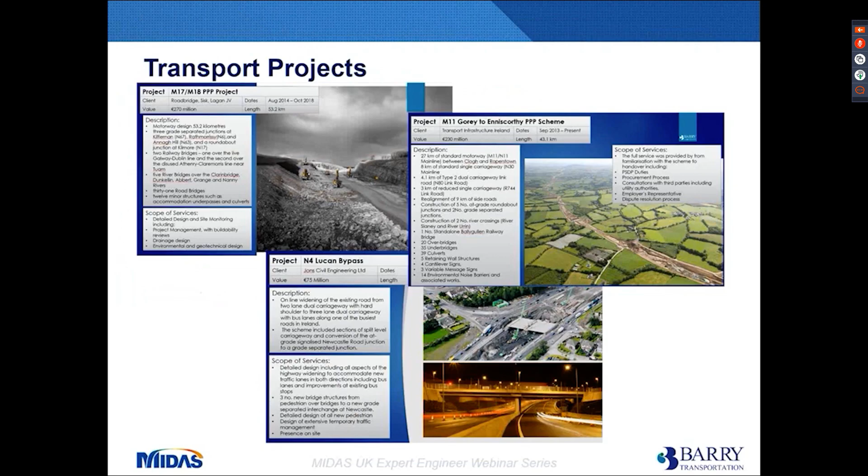But our main project portfolio is in Ireland. Specifically for roads and bridges, Barry Transportation was involved and is involved in the design, construction, supervision, or as an authority supervisory or advisory role for many major road projects in Ireland.

A little bit about myself. I have over 15 years experience in structural bridge design. I'm a chartered engineer, and I specialize in concrete bridges, but over the course of my career I also worked on a number of steel and composite structures.

I started my career in the Czech Republic, where I worked on a few motorway schemes, also in Slovakia. After moving to Ireland, I worked on a number of infrastructure projects here in Ireland and also in the UK.

Now let's have a look at what makes footbridge design different from a standard road or rail bridge, and what challenges the designer may have to face when designing a footbridge.

I would highlight key points related to footbridge design: aesthetics, structural robustness, and the need to pay attention to stability and vibration.

It is by no means unique to footbridges, but with footbridge design we may encounter these specific points more often, and they tend to play a bigger role at practically every footbridge we may design.

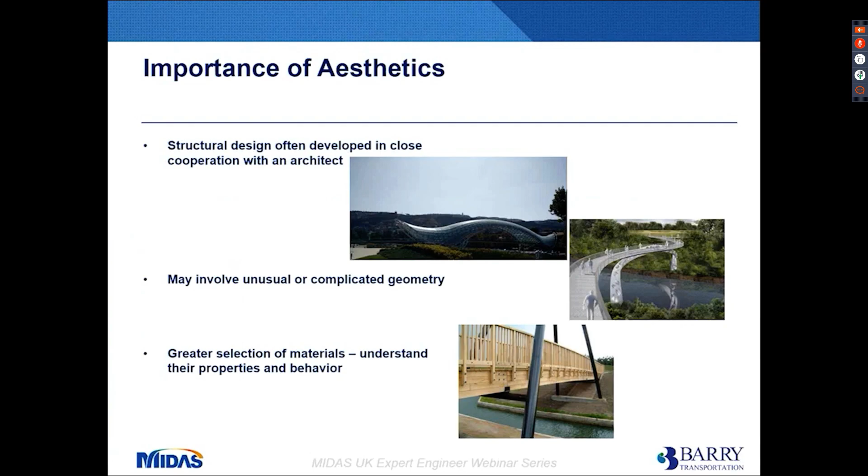In terms of structural robustness, when we design footbridges we want them to be lightweight. Quite often footbridges are very slender, airy structures, and at the same time we have to ensure that they have sufficient stiffness and strength to maintain their stability.

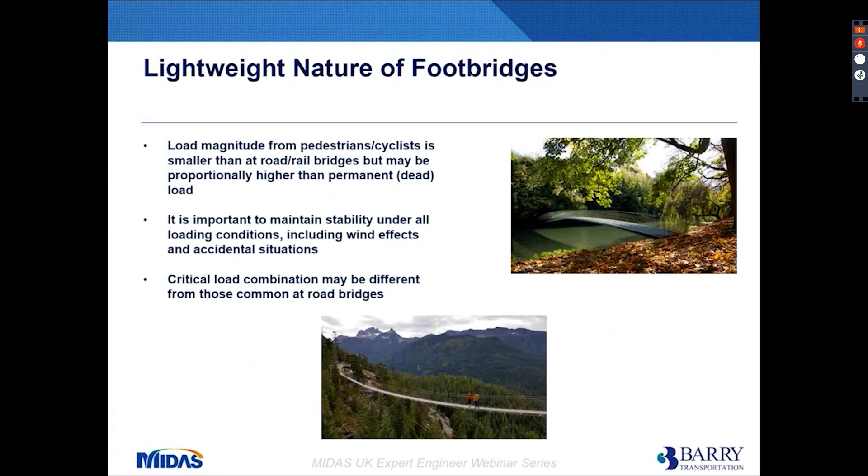It may be an issue for wind effects, or the critical combinations for the design may be quite different from those we are used to when we design road bridges.

With stability is also related dynamic response and vibration. It is not really usually an issue for a majority of short and medium span road bridges, but it is an important factor in footbridge design, because if the structure has a low natural frequency it may lead to unstable lateral response and, in the worst case, loss of stability.

But also it may lead to vibration, which may cause discomfort to users. Some of you who visited Northern Ireland would recognize that this is the Carrick-a-Rede bridge, a suspension footbridge on the north coast of Ireland.

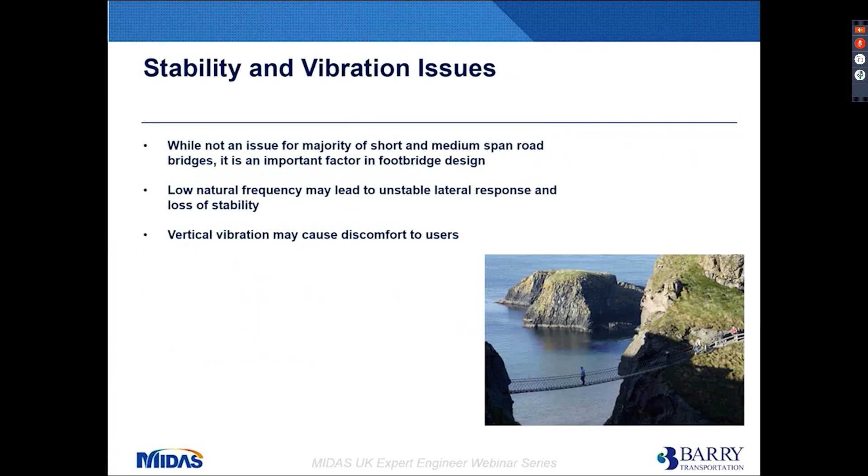Now we can have a look at some Eurocode requirements - just a brief overview of guidance and principles in the Eurocode which are particularly applicable to footbridge design.

Footbridges are subjected to different types of live load. So Eurocode 1, traffic loads on bridges, also contains requirements for dynamic loading on footbridges.

Also, accidental actions would be quite critical for footbridge design, as well as wind actions, and some of the clauses in the Eurocode dealing with wind actions cover footbridges.

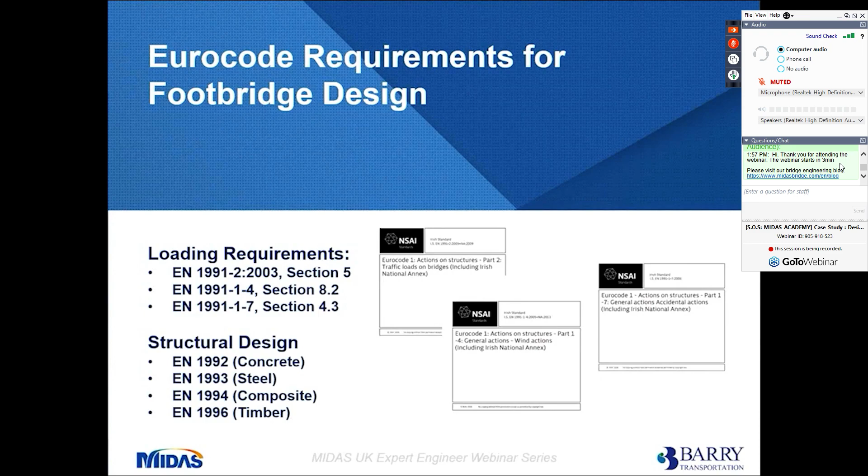The structural design is covered by Eurocode 2 to 6. The same limit state principles apply to footbridges - their global stability, member verification - as any other structure. So there wouldn't be any difference in this group of Eurocodes for the structural design.

We can have a closer look at the loading, because that's what differentiates the footbridges most from road and rail bridges.

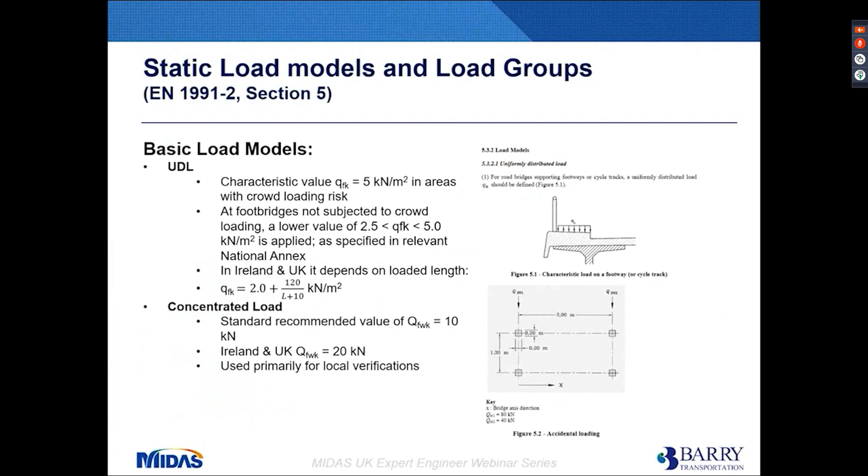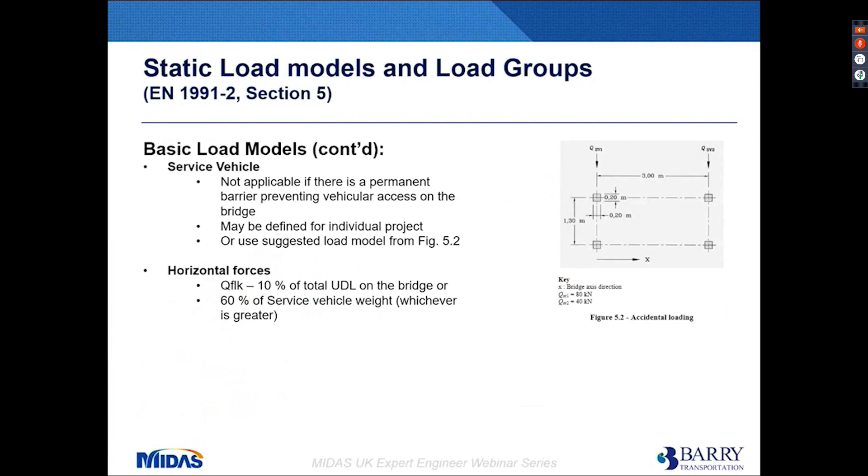The static loads and static load models are formed or made up from 4 elementary components, which is UDL (distributed load), concentrated load, service vehicle, and horizontal forces. And these 4 components are combined into groups of loads.

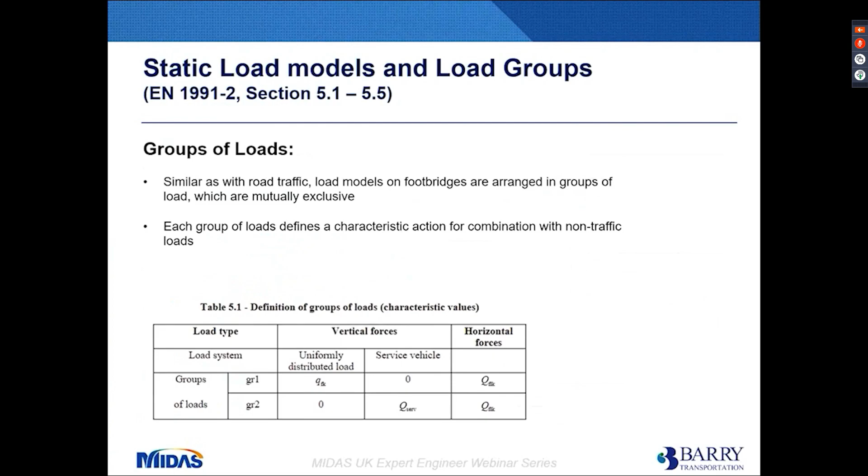It's a very similar concept to road traffic. So on footbridges, we either combine UDL and horizontal forces, or service vehicle and horizontal forces, and this group of load is treated as a single live load action for the purpose of combinations, factoring, and so on.

The accidental loads are covered partially in the traffic loading code in 1991-2, and partially in the accidental actions code 1991-1-7.

Since accidental loads can have fatal consequences for the structure and its users, and strengthening the footbridge to resist the full impact would be uneconomical, we take measures to avoid them.

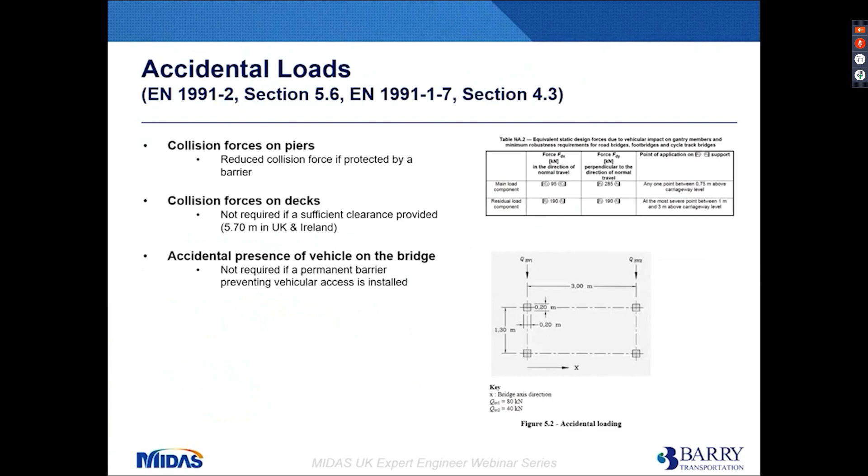Collision forces on piers of footbridges are reduced because the piers are usually protected by a barrier. Collision forces on decks - we can avoid application of this accidental load if we provide sufficient clearance, which in the UK and Ireland is 5.7 meters. And accidental presence of a vehicle on the bridge can also be avoided if a permanent barrier is installed, which prevents access of vehicles onto the bridge.

Now, what differentiates footbridges most from normal road bridges of short and medium span? That's the application of dynamic loads. There are two key points we need to pay attention to. The first is the natural frequency of the structure, because if any of the natural frequencies are identical to frequencies of forces applied to the structure - from pedestrians, joggers, or cyclists - there is a risk of resonance, which may lead to unacceptable vibration or even loss of stability.

So natural frequency is the first key point. The second key point to pay attention to is vibration. Vibration from normal pedestrian traffic should not cause discomfort to users, so that's why the code specifies a limit defined as an acceleration limit.

Dynamic effects of walking pedestrians can be represented by a periodic force, and this force will have a typical frequency between 1 and 3 Hertz. In the horizontal direction, the effects of walking pedestrians would have a frequency between 0.5 and 1.5 Hertz. And if there are a group of joggers crossing the bridge, that may induce forces with a frequency of about 3 Hertz.

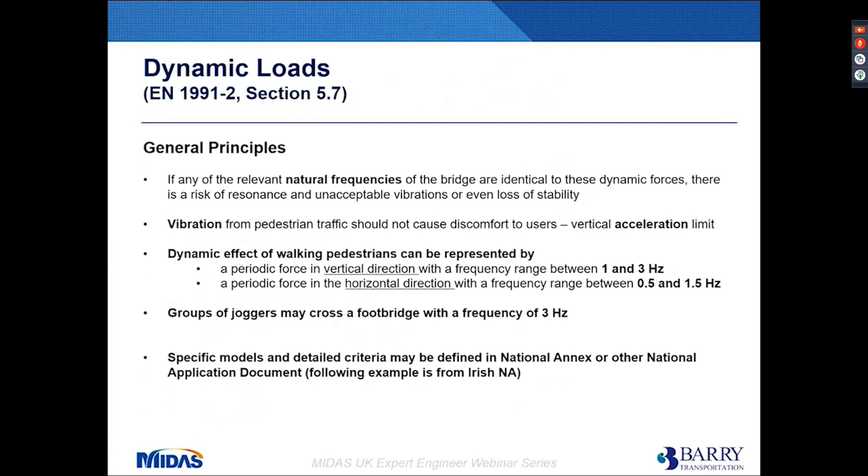So we can see that this range, say from 0.5 to 3 Hertz, would be a critical spectrum, and if any of the natural frequencies of the structure is within this spectrum, there is a risk of issues related to vibration or stability. So specific models and detailed criteria on how to fulfill this and how to achieve that the structure is stable are defined in the National Annex or other national application documents.

And for the UK and Ireland, the Eurocode 1 specifies the maximum vertical deck acceleration, which has a limiting serviceability value in the range between 0.5 and 2 meters per second squared. The exact limit value is calculated based on a formula in the code, and it depends on the site usage, route redundancy, and structure height.

Then the dynamic effects of pedestrians or groups of pedestrians are represented by the application of a vertical pulsating force, which moves across the span of the bridge. Again, there's an exact formula in the code which helps us as designers to calculate the magnitude of this load. It depends on the natural frequency and other factors.

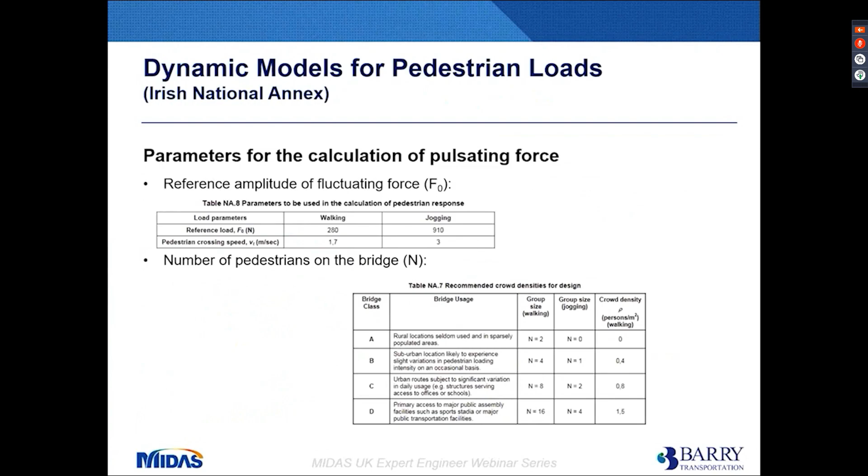The footbridges, for the purpose of dynamic loading, are split into 4 classes depending on the location and usage, and then the dynamic loading or dynamic force is applied. A different value may be applied depending on the bridge class. Also, we should know that the pedestrian crossing speed, how fast they walk, is also defined, which helps us define the duration of dynamic loading.

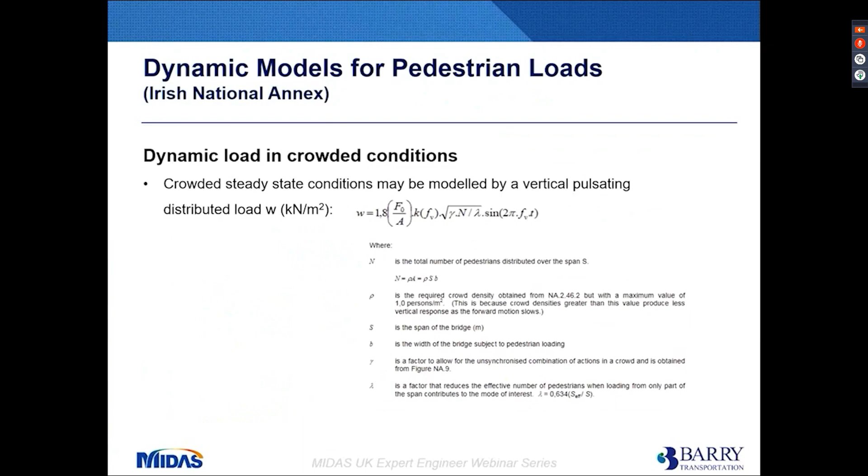The other aspect of dynamic loading would be loading in crowded conditions. So if the bridge is located in a city center or close to a stadium, it may get into a crowded state, and then instead of using a single point force pulsating and moving across the bridge, the dynamic loading is modeled by a vertical pulsating distributed load - a load over an area on the bridge. That helps us assess the possible vibration issues.

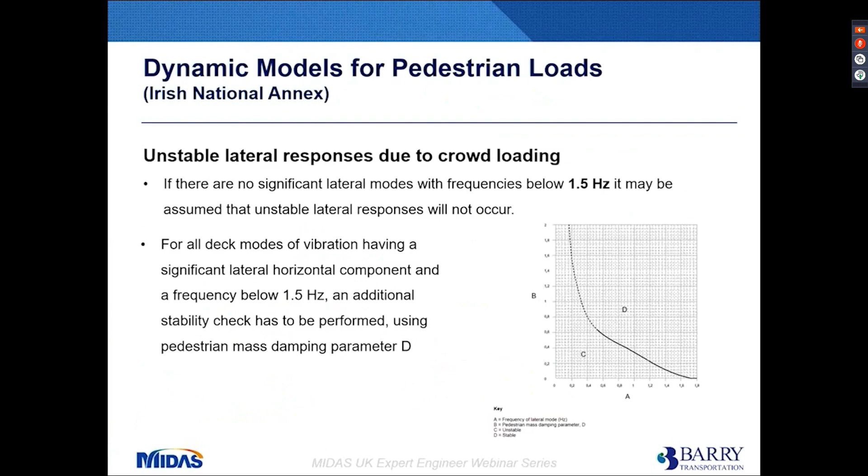The other requirement regarding natural frequencies is specified in the code: if there are no significant lateral modes with frequencies below 1.5 Hertz, we may assume that the structure is stable, that there's no risk of lateral instability. If any of the critical frequencies is lower than 1.5 Hertz, then there are additional checks to perform, or we may need to redesign the structure or introduce some damping devices.

Apart from pedestrian or generally traffic loading, in certain situations we may need to investigate the dynamic effects of wind loading, and the Eurocode dealing with wind loading also provides general guidance. It says that dynamic magnification effects due to vertical response can be ignored if fundamental frequencies in bending and torsion are greater than 1 Hertz, or we may need to fulfill an alternative condition.

But taking into account that generally we want to avoid frequencies below 1.5 or even 3 Hertz, it means that for most bridges where we fulfill the condition for the pedestrian dynamic load, we are fulfilling the condition for the wind loading as well. But for long span or special structures, it is something which needs to be taken into account.

So this was a brief overview of Eurocode requirements, which are applicable to footbridge design, especially in relation to dynamic effects, which are the main point for the footbridge design.

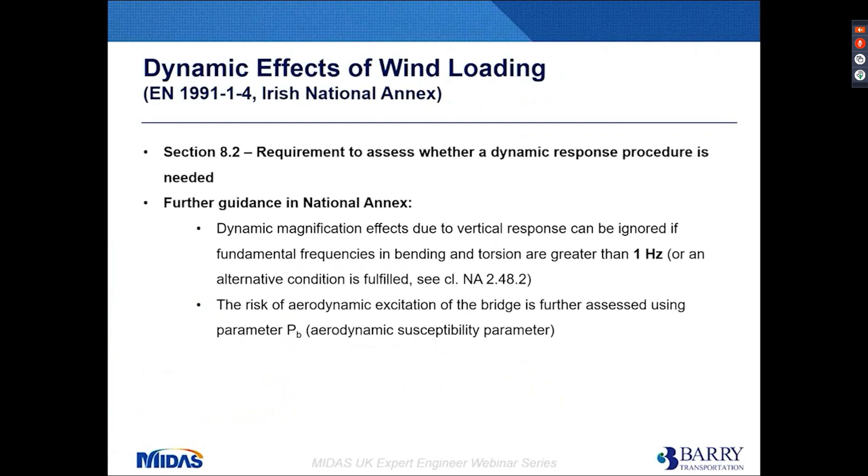Now we discuss how these requirements were applied on a Warren Truss footbridge. This structure has a span of 50 meters, a clear internal width of 3 meters. The maximum structural depth at midspan was 4.2 meters, and both top and bottom chords of the truss are curved in a gentle radius to improve the appearance. Although in this particular case, aesthetics wasn't a governing factor for the design because the bridge is in a rural location with low flow of pedestrians.

The design of this footbridge was actually developed as a result of a value engineering exercise or proposal, because the original structure was a 2-span beam and slab, and we proposed a single-span structure to avoid placing the support in the central median of the motorway, and the truss works well for this arrangement.

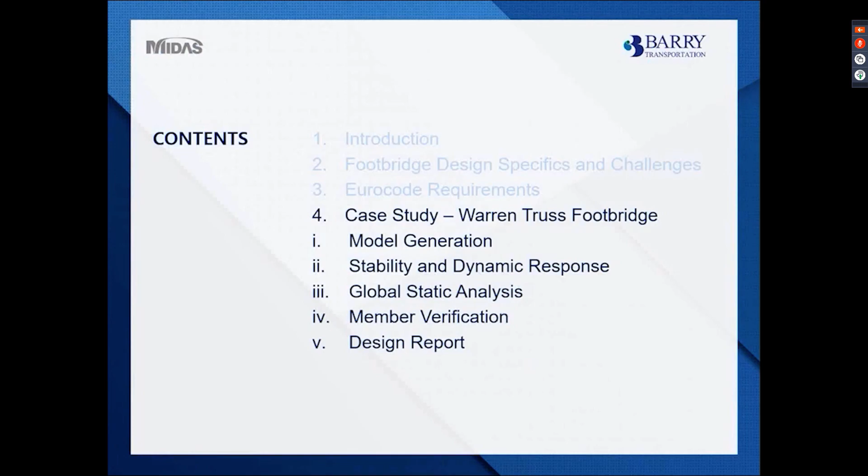So in the second part of our webinar, we can focus on how this particular structure, or generally a truss, can be generated in Midas, how we can generate a model in relation to what we discussed in the Eurocode requirements for dynamic response and natural frequencies. We will look into stability and dynamic response, and again how this can be performed in Midas. Then global static analysis, member verification, and the generation of the design report.

To create the geometry of the structure in Midas, there are a number of options available to us. One method is using the Midas Truss wizard. Midas has a set of tools called wizards for generating geometry of basic structures, so there are wizards for arches, for culverts or frames, as well as a wizard for truss.

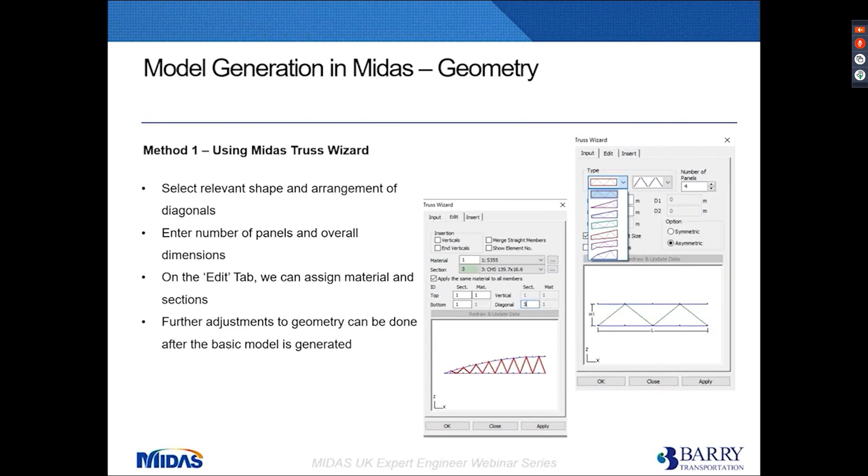We can select the specific or closest similar shape of truss, enter a number of panels and overall dimensions. We can edit nodes or even assign material and sections, and then do final adjustments when the geometry is generated. So this wizard will generate a 2D truss for the structure, like the Warren Truss footbridge. In our case, this would have to be copied and assembled for a full 3D model.

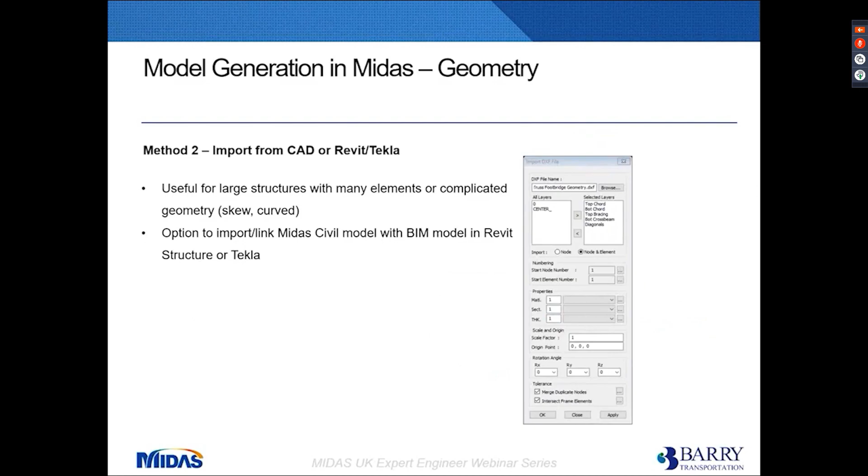The second method, which is especially useful for larger structures with many elements, or for complicated geometry when we have a skew arrangement or curved structure, is to import a CAD file directly, or there's even an option to import or link the Midas Civil model with a BIM model in Revit Structure or Tekla. That's done with the help of an add-on installed in Revit or Tekla, which allows the exchange of information between the two pieces of software.

The structure properties are standard for any structure. In this particular case, the steel truss is of S355 steel. The main truss is made from circular hollow sections. The rectangular hollow sections form the deck cross beams only. And the structure is articulated, sitting on elastomeric bearings.

So the stiffness of the bearing, calculated based on the properties of the elastomers, can be included in the model.

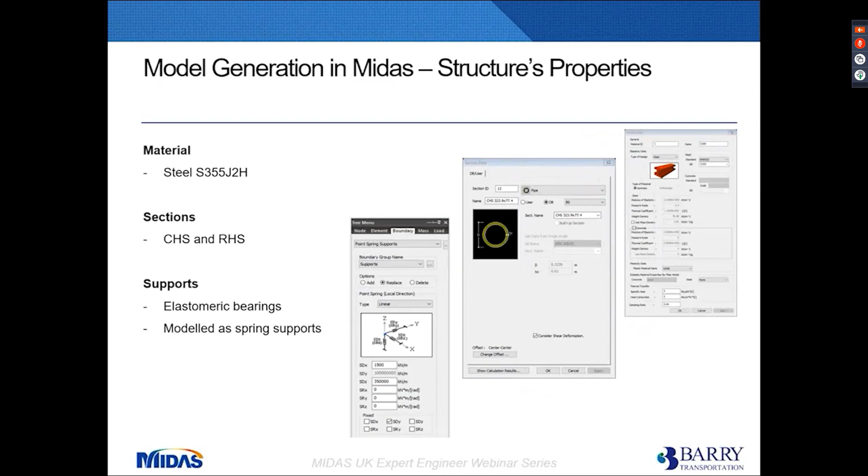There are some additional properties and settings which specifically relate to or enable us to perform dynamic analysis. One of them is the need to create an element on which we can apply the dynamic pulsating force. In my case, I created a dummy beam on the bridge centerline on which the pulsating force is applied.

The other important point for the dynamic and modal analysis is setting the conversion of self-weight into masses. That's a tick in the structure type setting, convert self-weight into masses. If we want to convert other types of loads, like superimposed dead load, into masses, that's done in the load menu using the load to masses dialog.

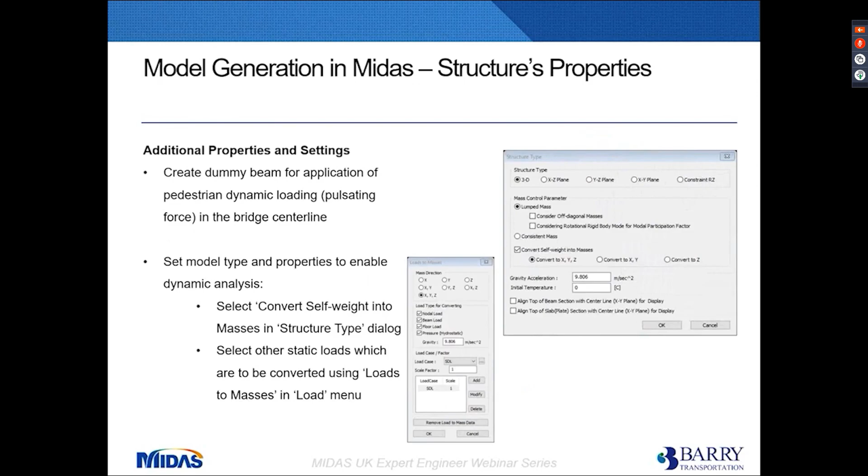The other properties and build-up of the model would be very similar to any other structure. So we define all the load cases and combinations and can analyze the structure.

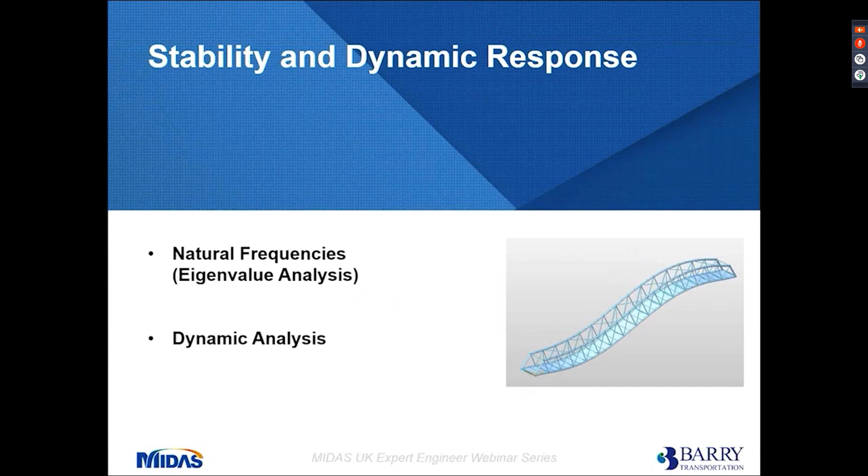We can now focus on how we verify or analyze the stability and dynamic response of the structure. I mentioned before that it has two key parts. First is the natural frequency, which in Midas is called Eigenvalue Analysis. And the other key part is the dynamic response, so application of dynamic load.

To investigate the natural frequencies of the structure, we turn on the Eigenvalue Analysis control in the Analysis menu in Midas, and we do it by selecting the number of frequencies we want to analyze. In this particular case, I selected 7. We may go for 10 or even more, because some of the higher frequencies may still be realistic and applicable to the structure.

Then we need to analyze different modes of vibration, because natural frequency is basically the frequency at which the structure vibrates naturally. In different directions, longitudinal, transverse, vertical, or twisting, the structure would vibrate at different frequencies. And we need to prove that the modes of vibration are not close to the critical values of vibration induced by pedestrians, which is generally in the range of between 1 and 3 hertz.

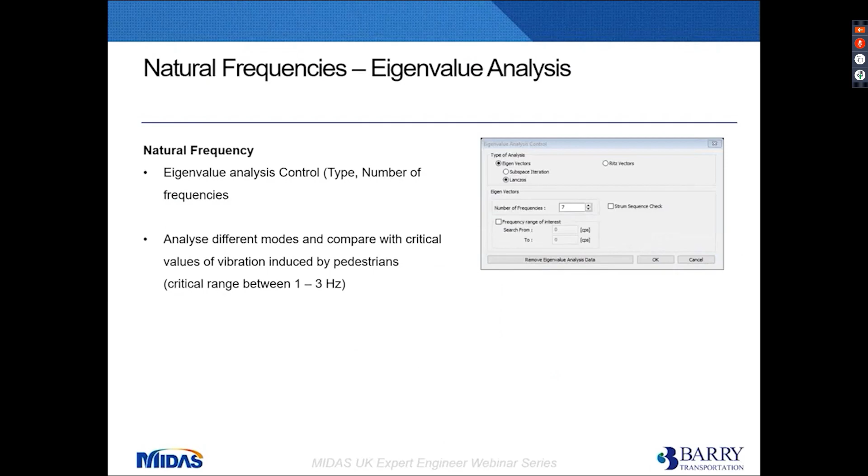But at the same time, when we check what's the shape or mode of that vibration, we notice that it is vibrating in the longitudinal axis of the bridge, so it wouldn't be critical.

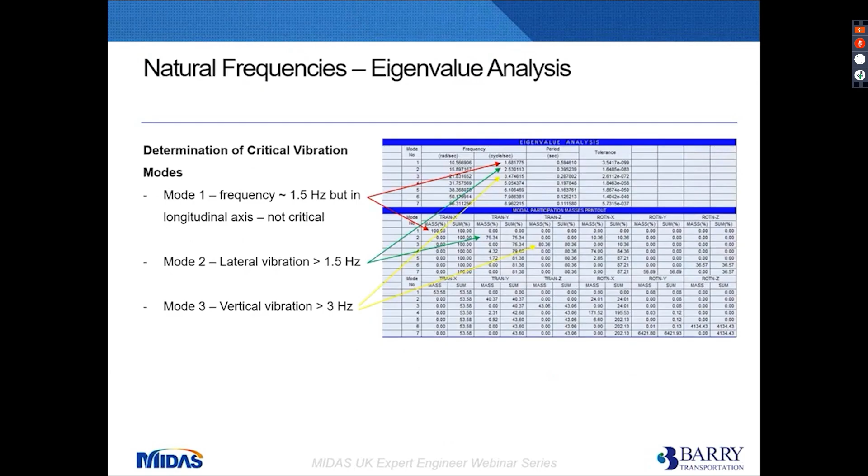The third mode is over 3 hertz, 3.47, which is in vertical direction, so actual vertical vibration. This provides an overview, but we can also check the actual graphic results or see the exact shape of vibration.

In the following short video, you can see how it can be done in Midas. We go to results, select mode shapes, vibration mode shapes, and then select the relevant mode. We want to display legend, and when we hit apply, it will display the shape of the structure in this particular mode. Also in the legend, we can check the actual frequency and the direction in which the structure vibrates.

So here we can see that it's in longitudinal direction. For the second mode, we can see that the deflected shape has changed, as did the frequency. It's exactly the same as in the table shown before.

And if we turn on animation and click recording, it will actually show us the shape or the vibration in animation, so we can get a better idea how this mode of natural frequency works.

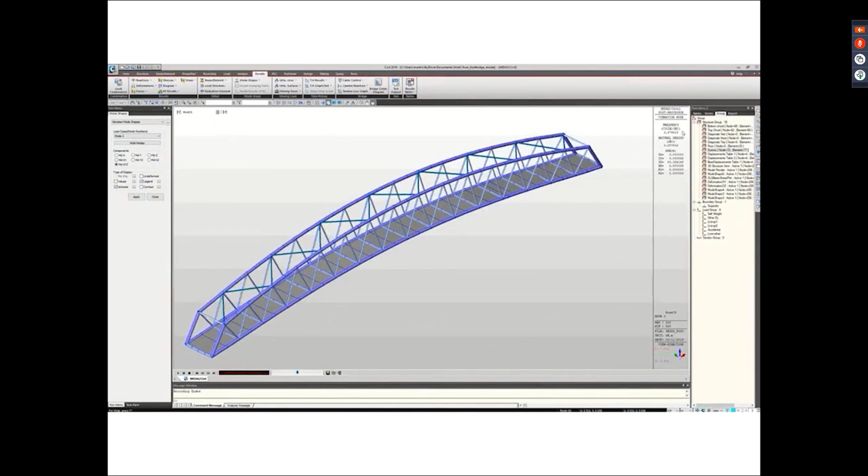So that was the first verification, natural frequencies. For the assessment of dynamic response, we want to prove that the vertical deck acceleration is within the limits set in the code, so that any vibration is not causing any discomfort to the users.

How is it applied? Well, we said that the dynamic load is applied by the pulsating or fluctuating force. This in Midas is done in a way that the value of the force is calculated in time increments. So we create a set of force values at different defined times, and then the force is applied on a series of nodes along the bridge span.

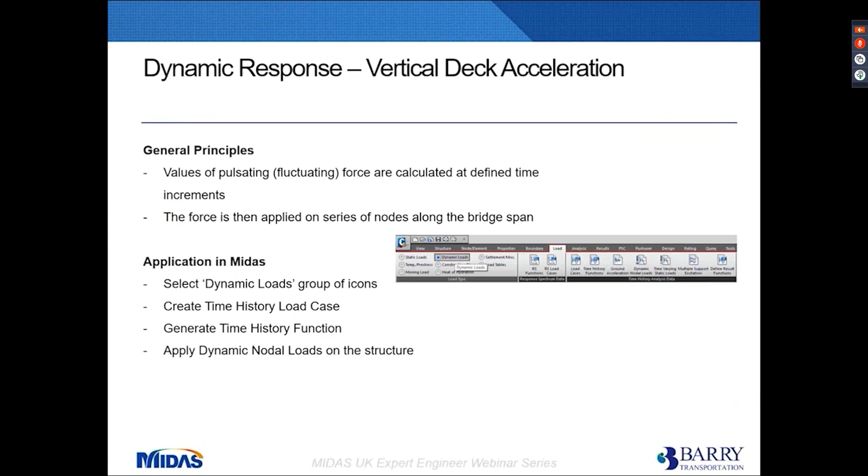The procedure for how to apply the dynamic load in Midas is not really self-explanatory, but relatively understandable, because in the load menu we have dynamic load type and a series of icons. We follow those icons to create a time history load case, to generate a time history function, and then to apply dynamic nodal loads on the structure if we deal with node load and not with the crowd condition.

We also specify the damping ratio, and in the time history function, we calculate the value of the fluctuating force for time increments. In this particular case, the time increments were 1/100 of a second, and the series of values can be copied, calculated, for example in Excel, and then copied into Midas, which creates this fluctuating force of sine profile.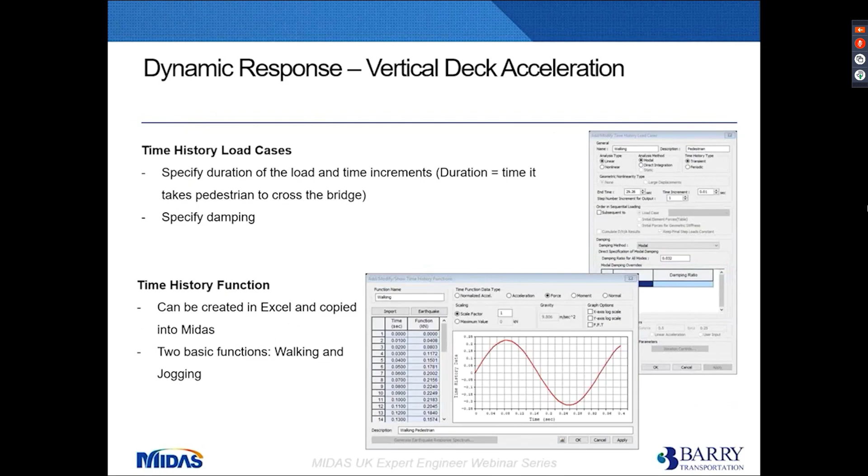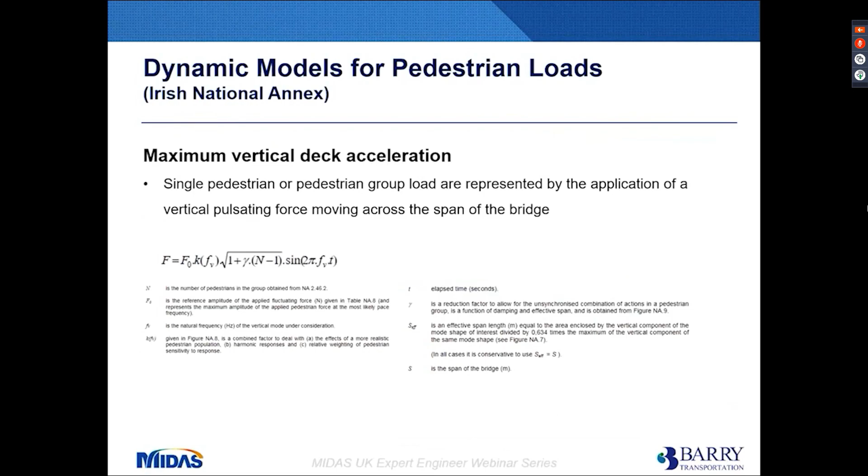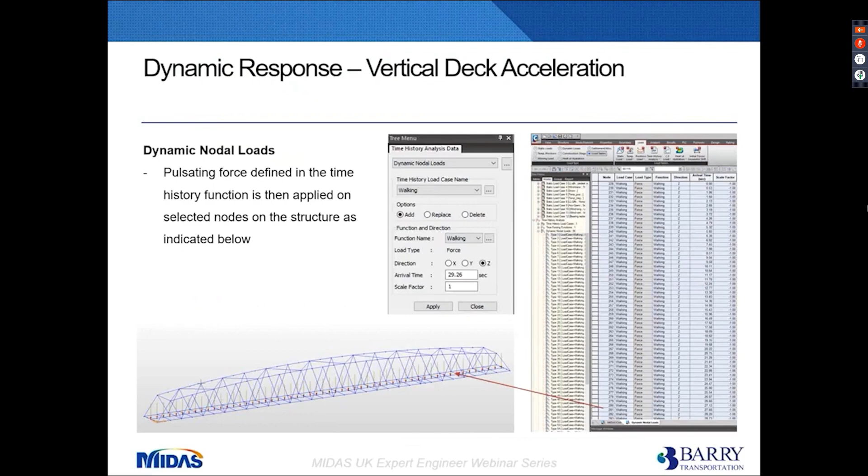This is just a copy from the previous slide of the pulsating force. So this pulsating force actually forms the time history function in Midas. And then this pulsating force, as defined in the time history function, is applied on selected nodes on the structure, as we can see on the screenshots below.

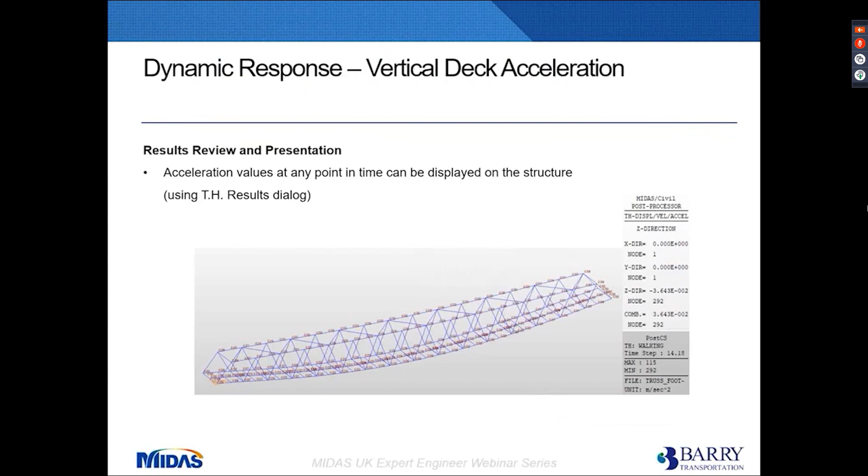We analyze it, and we can review the acceleration, forces, or displacement at any point in graphical or numerical form. The problem is, if our time increments are hundreds per second, it's a lot of values, a lot of numbers to review. So it's not very practical to look at it this way.

But there's a function in Midas where we can create an envelope of results for any selected point on the structure, and this will create a graph showing acceleration envelope. It's in the time history graph function. This is actually a plot from our Warren-Truss footbridge. We can see that the peak acceleration was only 0.036 meters per second squared, which is much smaller than the limiting value in the code, even at 0.5.

This is because of the low pedestrian loading, since it's in a rural condition, category A. So it is not expected to have more than 1 or 2 people on the bridge at the same time.

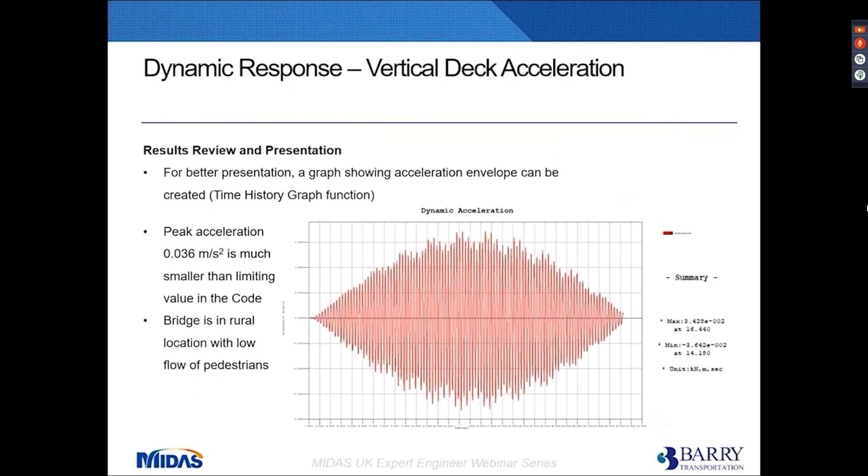But we can also see that the peak accelerations are close to the middle of the time period. It shows that the maximum acceleration would be at time 16 seconds, the minimum at 14 seconds. And it makes sense because that's when the pedestrian is right in the middle of the bridge, so it has the greatest effect on the vibration.

Again, in the following short demonstration, we can see how to create this time history graph. So we go to results, time history graph, and we define the function we want to create the graph for. We are interested in acceleration, so we add a new function and create a name for it. We select a node for which we want to create a graph or envelope of results.

The greatest movement is expected on a simply supported structure in the midspan, so we select a midspan node. We want to get accelerations in the vertical direction.

And we use it for the load case we created for the dynamic load case. We can even select which mode is critical for this—we will use mode number 3. So this will create a function for graphing.

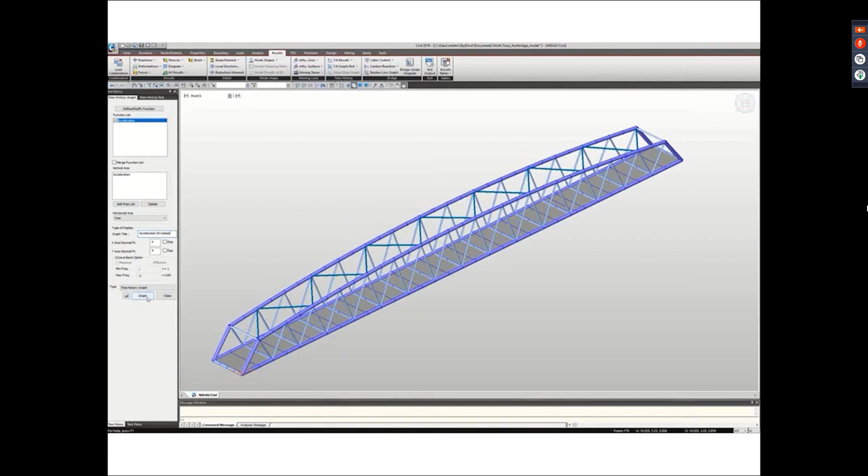And then we just select the function. It's either added to the list, or in this case it's already on the list. We create a title for the graph, so we are creating an acceleration envelope, then hit graph, and the graph is created.

If we want to present the graph further, export it, or use it in the report, there's a button next to the graph called dynamic report chart, and it basically creates a reference of this graph which we can use for creation of the report.

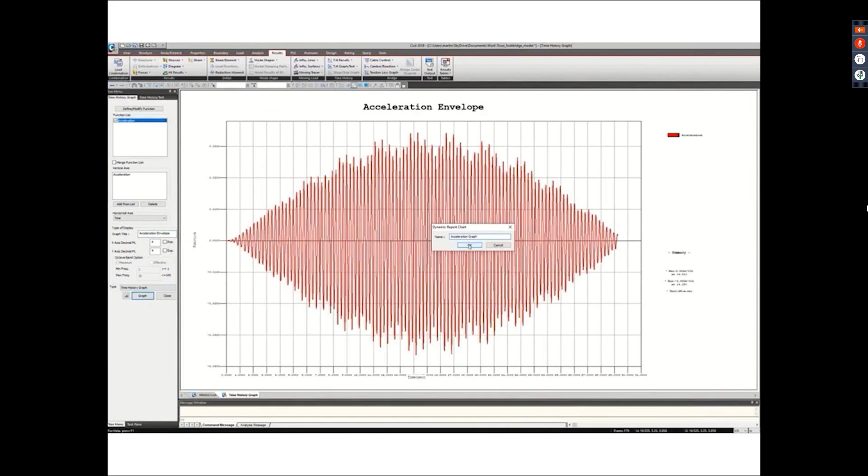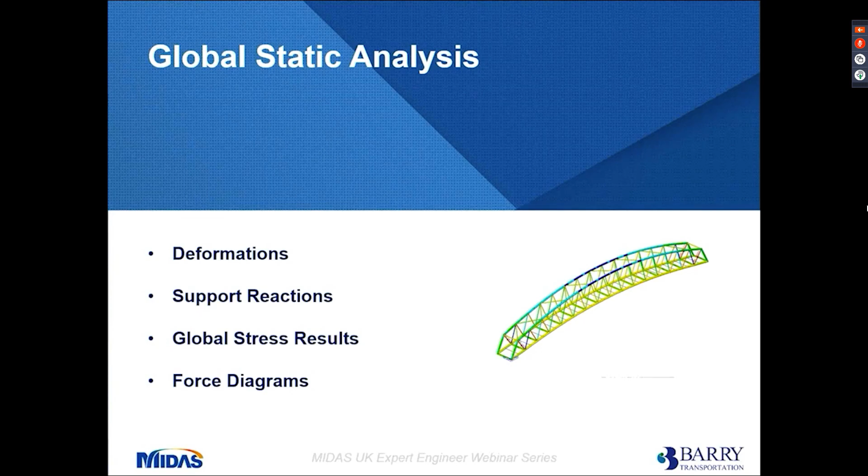So this was all related to dynamic analysis, investigation of natural frequencies, and vibration of the structure. The global static analysis is performed the same way as any other structure. We generally look at 4 main types of results: deformations, reactions, stress results, and force diagrams.

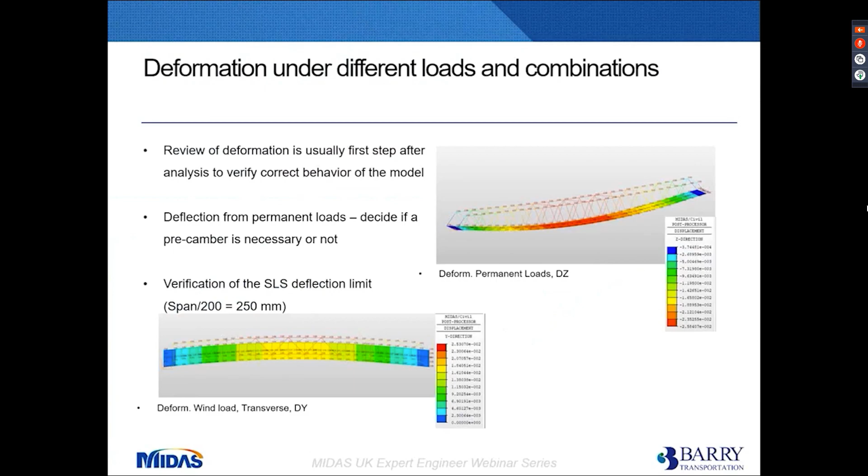Deformation—we tend to take for granted that it's so easy to get these results from the software, but it's good and prudent to review the deformation as a first step after the analysis, just to verify that the model behaves correctly and the deformations are realistic. It can also help us see if there's a need, particularly for steel structures, to introduce any precamber to compensate for sagging from the permanent load. And we also verify that the deflection of the structure is within the limit given in the code.

Similarly, the support reactions—we generally want to use them for the bearing design, to create a bearing schedule and pass them to the bearing designer. But as a first step, we should review the model results and compare them with hand calculations, to get an idea of the magnitude of reactions we should expect for permanent loads and live loads. Especially with statically indeterminate structures, we may check for any anomalies, high reactions, particular directions, or moments, and so on.

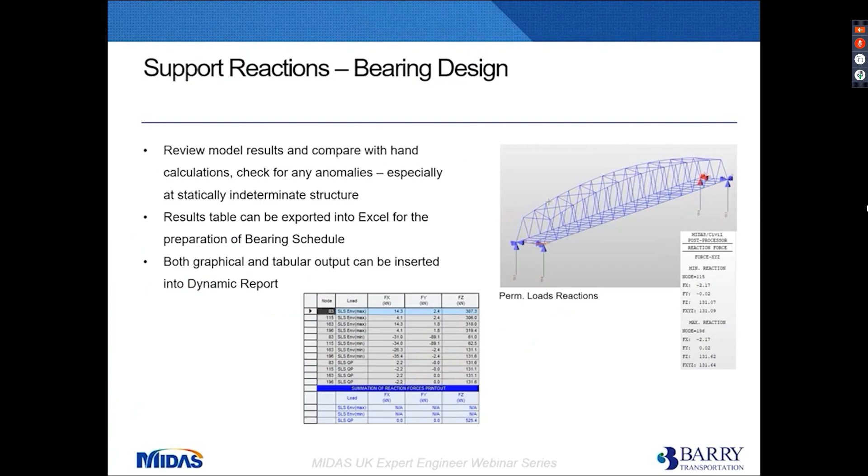Both graphical and tabular output, as presented on this slide, can be inserted into the dynamic report.

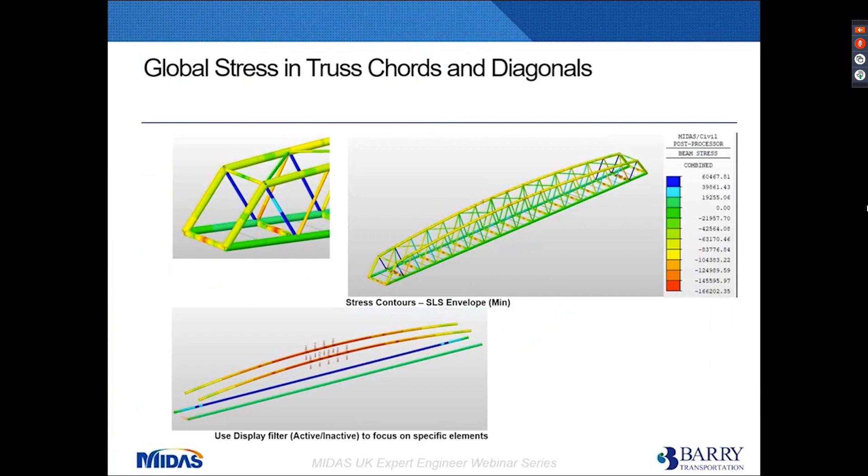For a steel truss like this one, an initial member sizing is based on global stress in main chords and the most stressed diagonals, which are near supports. So again, this is something to help us with the initial design.

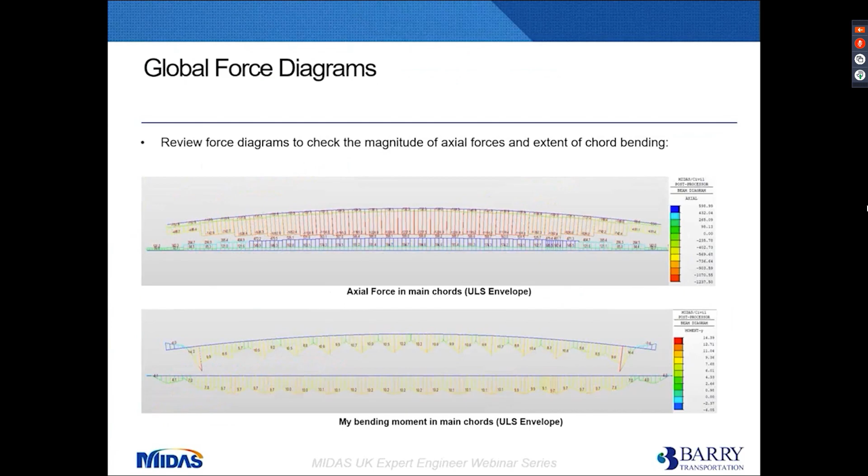And review of the bending moment diagram—it may not seem important for a truss where we expect mostly axial forces, but if the structure is modeled, like this particular one, as a frame instead of using truss tension-compression-only members, then we need to verify there are no higher or high bending moments in connections, which would affect the member verification.

The member verification is the final set of checks, and it's usually the most time consuming because there's a number of hand calculations we need to perform. They are highly repetitive—for each critical member, we need to perform the same set of calculations.

Quite often in the office, we have in-house prepared design spreadsheets which save time, but we still need to identify which members are critical. We need to transfer the results from the model and put them into the spreadsheet. So it's quite useful that Midas has a set of member design features which simplify this task.

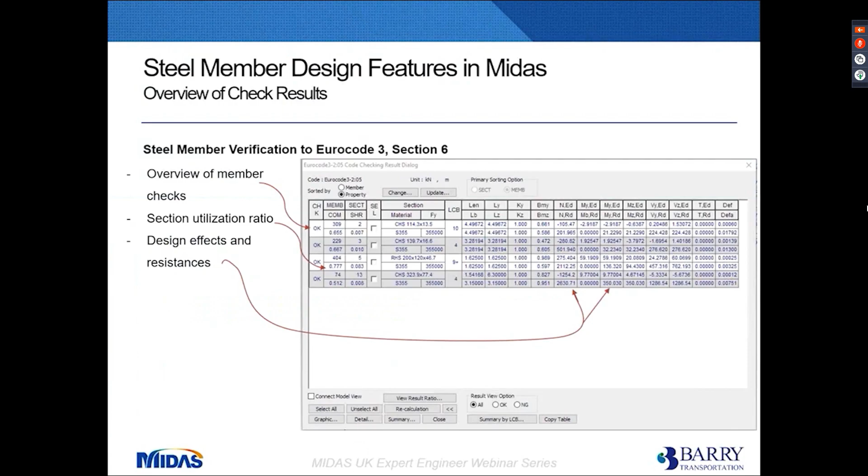Member design or member verification in Midas has 3 layers or levels. The first layer is the overview of member checks. In the design menu, under steel, we have a code check option, and this table provides a very clear overview whether all elements are passing the check, what's the sectional utilization, and also the design effects, the forces which were taken into account, and the resistances. So this is the first layer.

The second layer, if we select a specific member from the table, we can display graphic results, which provide more details, some design parameters, checking results. And again, we can export this or print it out.

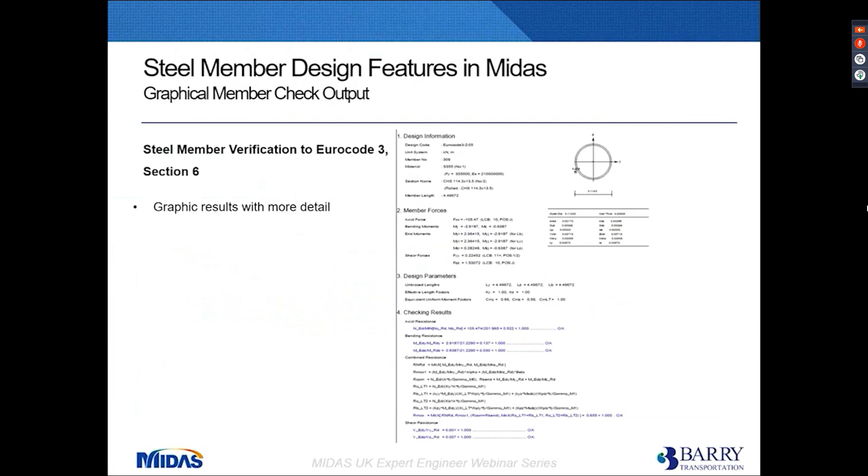And the third layer is the text output. Again, we can select a specific member and get text output with detailed description of loads, properties, and verifications, which is typically several pages of text, but very detailed and closely following the structure as required in the Eurocode. So this helps to simplify the member verification, taking into account the imperfections and so on.

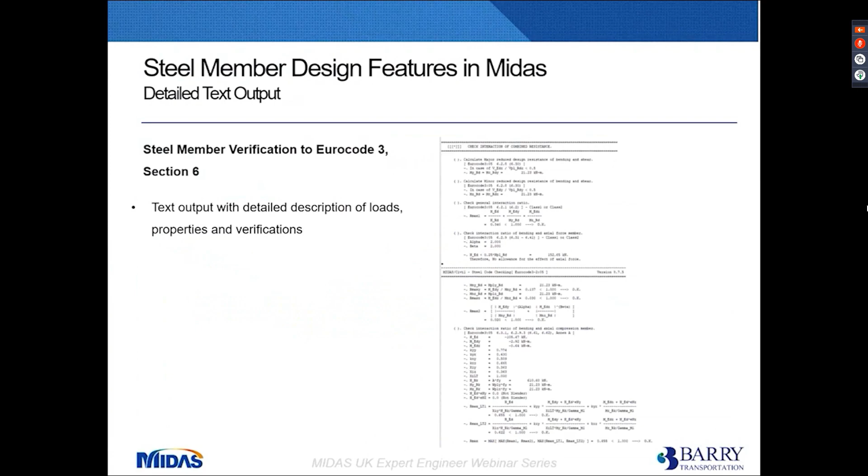Then the last part of this webinar, I will talk just a few minutes about dynamic report generation. We need to record our design process as designers for archiving. We may need to provide the information to the design checker. If we collaborate with other designers, other structures, we may have to pass the information on. And sometimes we want to present the results of our analysis and design.

So for all these reasons, the dynamic report feature in Midas provides an effective means how to prepare such a report.

Dynamic report, the idea of how it works, is that we create model references which we want to include in the report. So it may be graphics, images, or screenshots of stresses, reactions, bending moments, and so on. We can also select some tables and charts, like the acceleration chart we have shown before.

Then we start the dynamic report generator and insert those references into the report. We may add our own notes or additional information, save it, and if anything in the model changes in the future, we need to update load values or update the structural arrangement. We can always open the existing report and update the information from the current model.

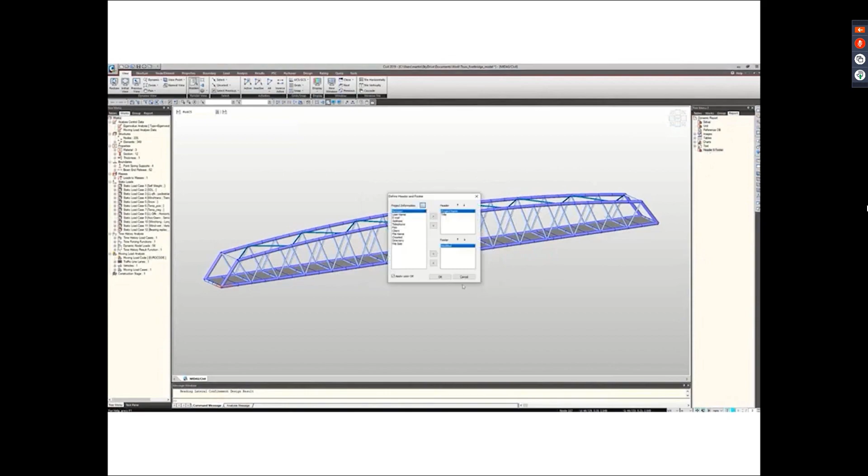We can select the basic formatting, font and sizes. We can select the information we want to include in the header and footer of the document. And then in the Tools menu, there's a dynamic report generator. So when we create a new document,

it opens basically a blank Word document within Midas. We can add header and footer we prepared, and then add information from our model. So there are groups of information: images, tables, charts, and text.

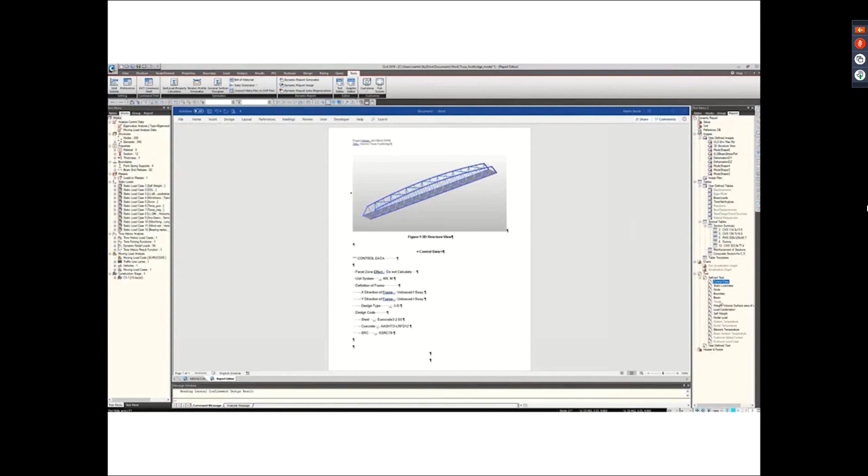And some of them are predefined, prepared automatically. Some of them we need to select ourselves. So we can include the structural view of the model. We can insert the control data of our Midas model, or a list of our static load cases.

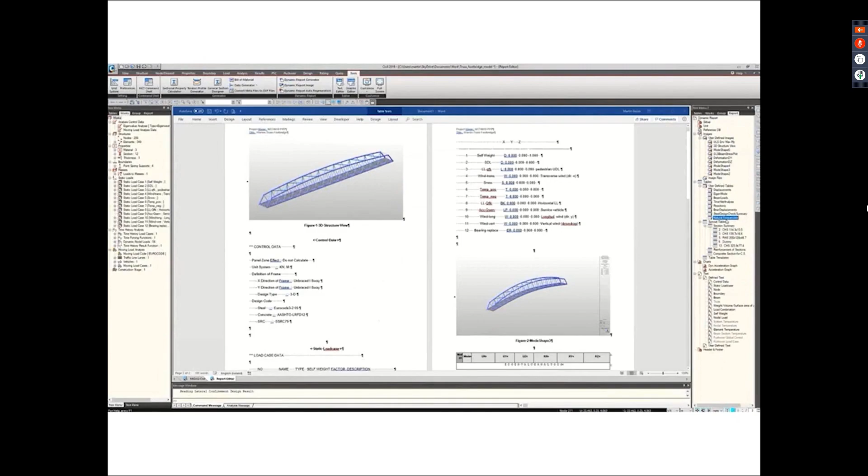When we analyze the natural frequencies, we may want to include some of the illustrations or figures of the critical frequencies and their shapes, as well as the table providing the information about all natural frequencies and their direction.

We also covered the acceleration. So when we create an acceleration graph, it can be inserted into the dynamic report.

And from the member verification, the table with the overview of member verification results, again, it can be inserted into the report, providing the overview of the member checks.

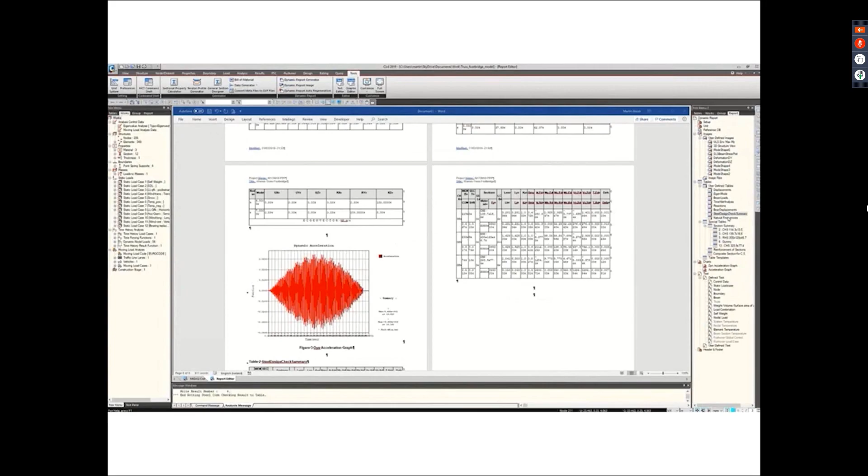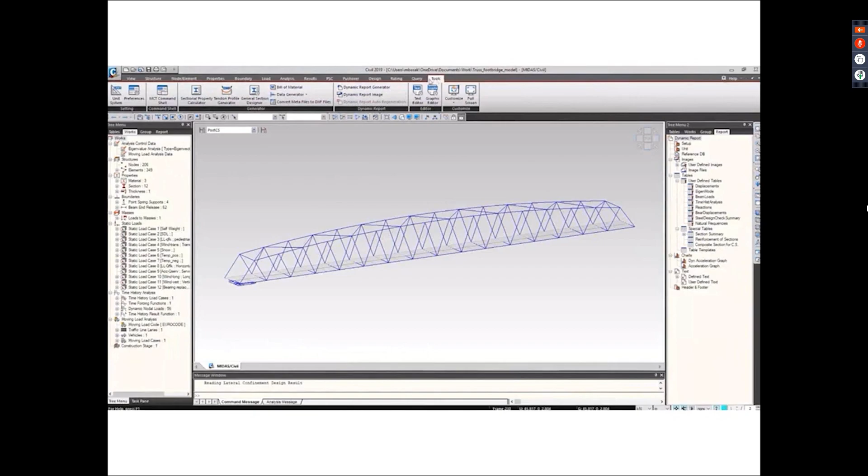So then we can add our own information, explanation, or notes and save the report as we would do with any other Word document. If we want to update the report, again, we go to Tools, Dynamic Report Generator, and instead of creating a new document, we select Open Document.

So we select the report we created before. The report opens. And then another menu, Dynamic Report Auto Regeneration, is highlighted.

So we can actually select information we already have in the report, like images, tables, or charts, and tick boxes which of them we want to regenerate or update with the most current values from the model.

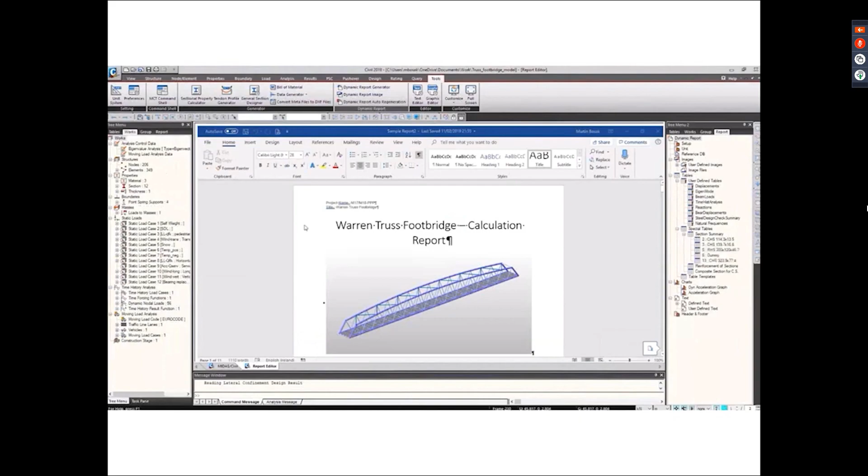So the benefits of dynamic report are obvious. They allow us to select various types of information from the model views, diagrams, charts, tables, or even text. And because the report is linked with the model, we can make sure that it will be always up to date. The fact that it is generated in a separate file in the Word document also opens to us a possibility to add additional information and modify it, format it as we wish. And the report can be updated to reflect any model changes.